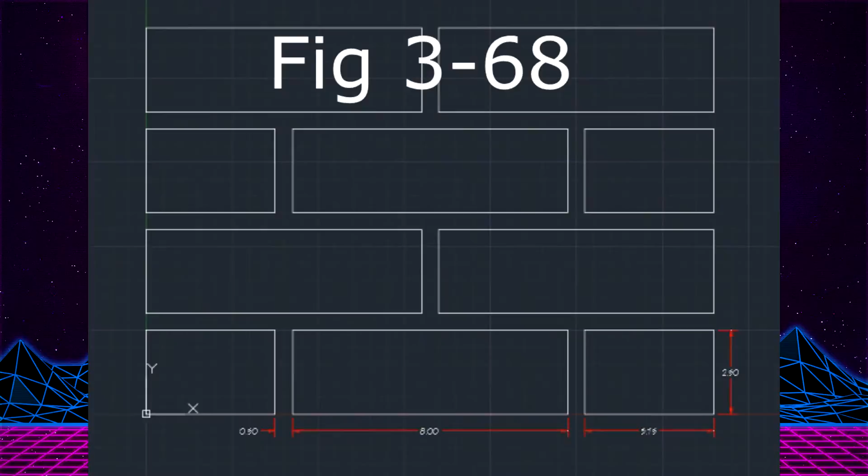So I'm here with my son Luke again, and well, we're getting ready to start another brick in the wall lesson. That would be figure 3-68.

And Luke, you ready to learn? Dad. Yeah, Luke. We don't need no education. We don't need no education. Well, here, I'm just going to put another brick in the wall.

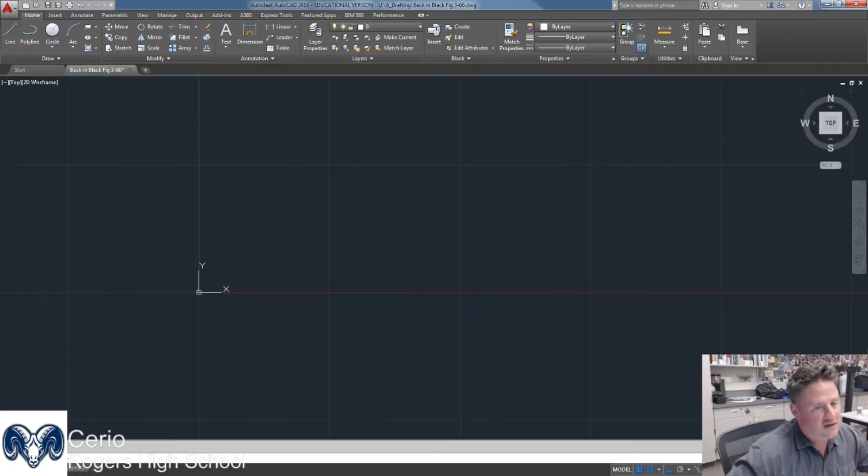So what we're going to do here is we're going to draw out this brick pattern, but we're going to copy and paste using displacement. So I'm going to draw a line, once again starting at 0, 0. But here's what I need to do. I need to establish some points here. So let's go ahead and draw a vertical. And I'm going to step this off.

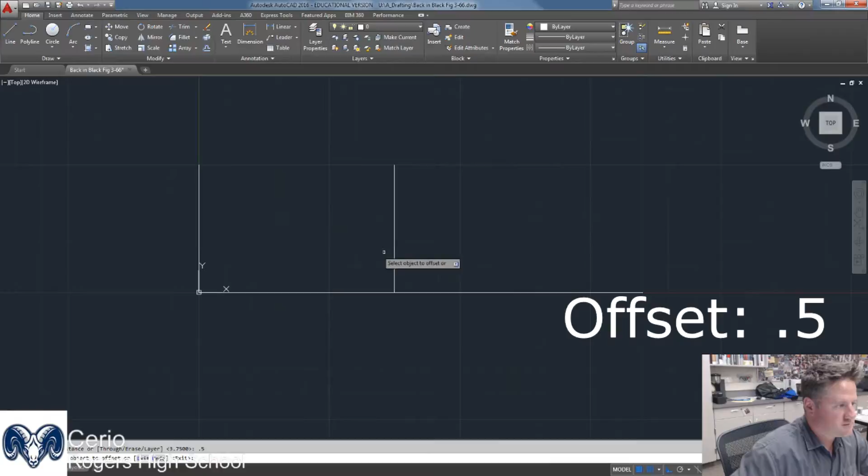I'm going to offset 3.75 here. And the grout line is 0.5, so I'll offset 0.5. And then the large brick is 8, so I'll offset that, 8. And now I want to offset one more time, 0.5. And we're going to offset 3.75.

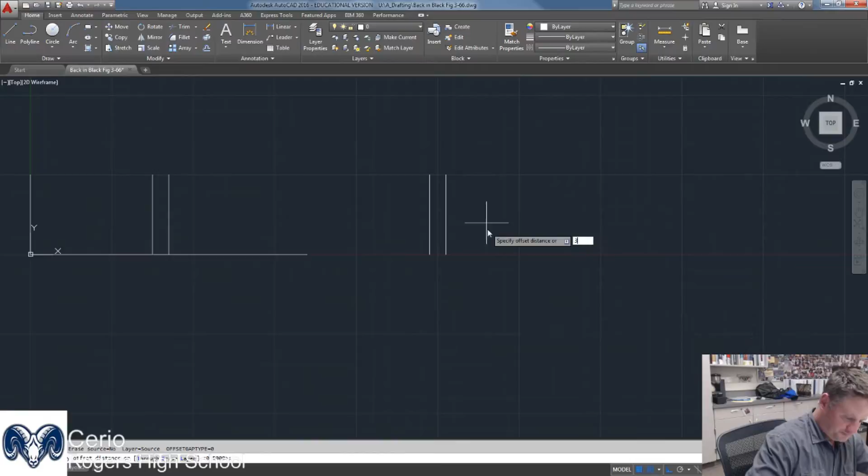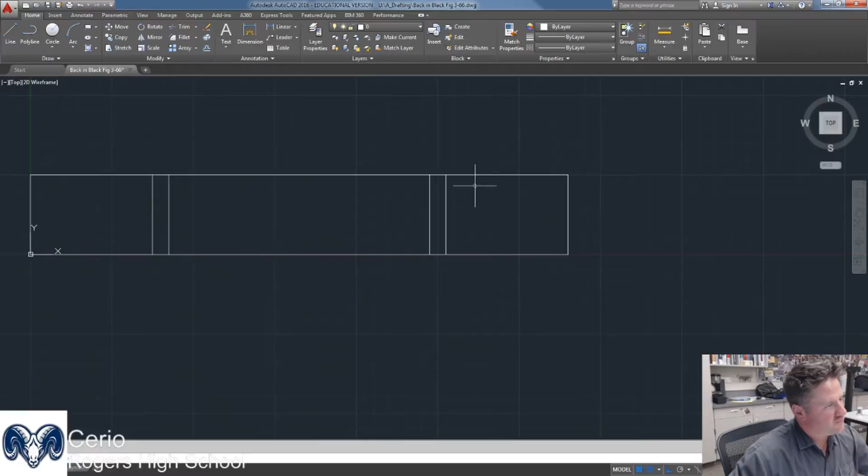And let's go ahead and finish this up. Let's extend here to here. I'm going to now copy this line from this endpoint to here. And so I want to trim this up and make this bottom brick pattern work. So let's go ahead and trim. And I'm going to select only the vertical lines so I can have my grout joints. And I'm going to slide this down just a little bit.

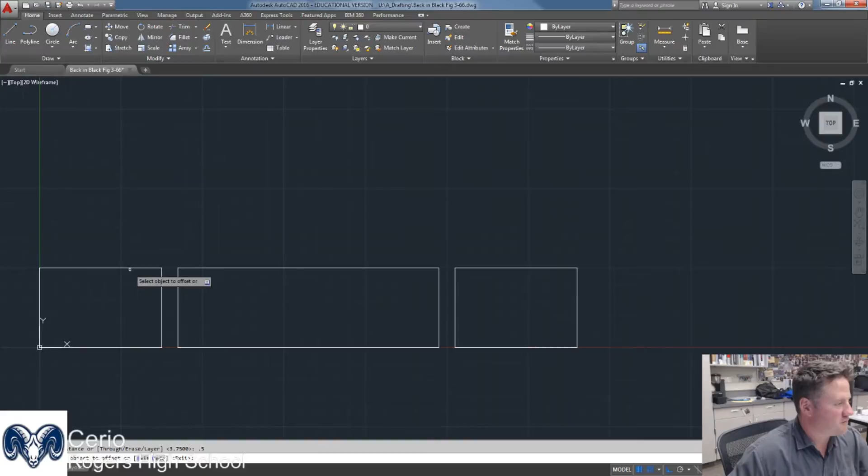Now I need to establish my next grout joint, if you will. And think of these as bricks on a pallet. What we need to do is take this brick and put it here, or we need to copy it to here. So let's take a peek. Offset 0.5 gives me my grout joint. Now watch here. I'm going to move this line from this endpoint to its old endpoint.

And why I did that is if I was to copy this brick to here, this line would be hidden underneath, and when we tried to dimension it, it would be a double line, or if you were doing some NC code or whatnot, it would actually come up with an error because it's a double line or double geometry error. So let's go ahead and now we're going to copy.

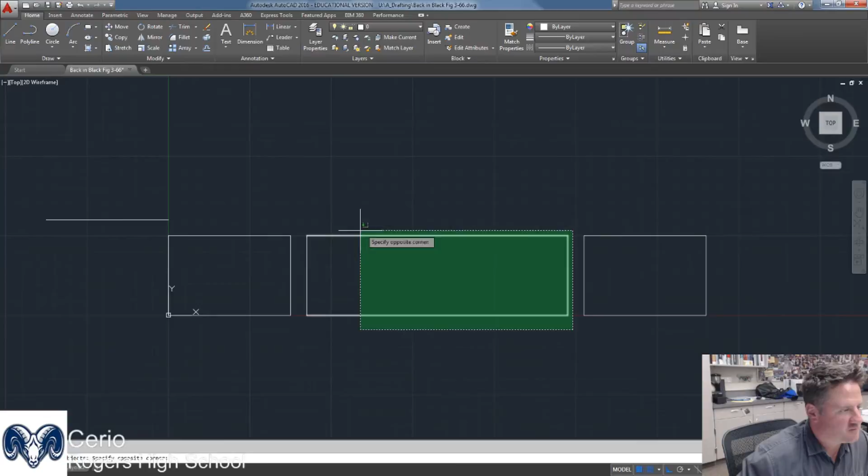Now this is why I need to select the base point. I'm going to select the brick. I'm going to select this intersection because it's going to end up right there. Okay? Now, this is pretty cool. I'm not going to copy that. I'm going to get rid of this reference geometry. I'm going to draw a line from the midpoint of here, and I'm just going to draw it up like so. Now, why would I draw that? Because I'm going to use the command mirror.

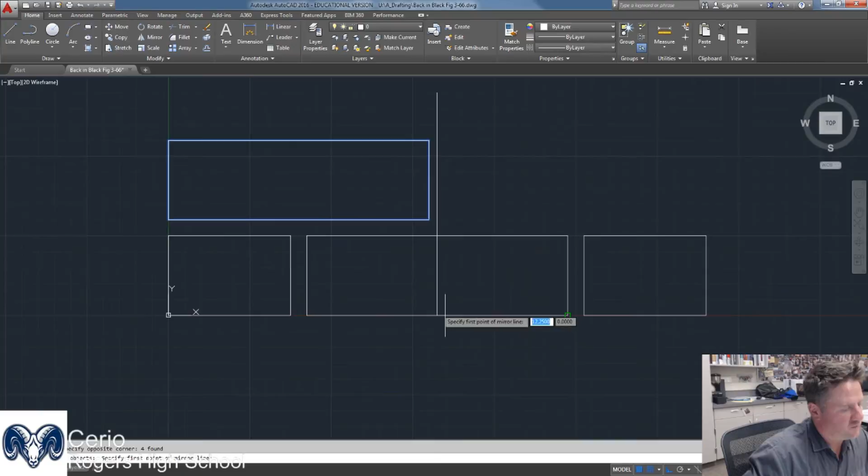I'm going to mirror this brick, and I'm going to use this endpoint here. I'm going to take F9 off. And see here, F8 is still on, so it'll put that brick anywhere in one of those quadrants. And there we go. So mirror, select what we want to mirror, use this endpoint, and there we go. Now the coolest part about this is we're about a line and a half from being done.

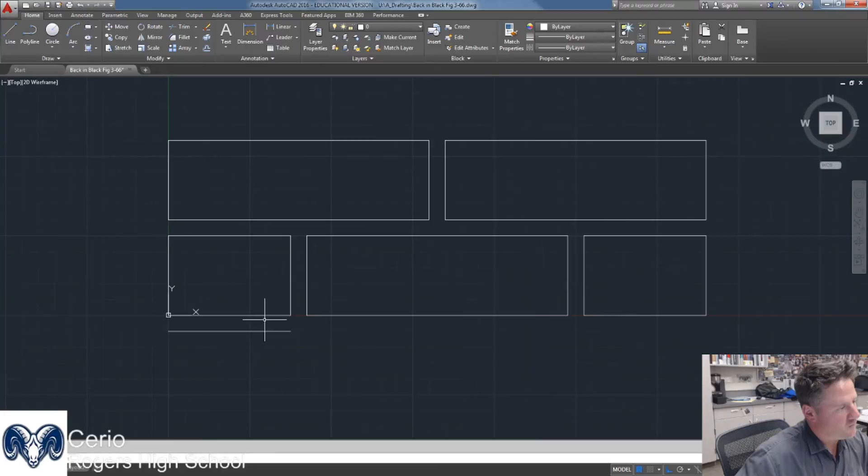So we're going to offset now. And I'm going to go ahead now. All that is a piece of reference geometry. Now watch how this works. I know this pattern repeats, so I'm going to copy the whole pattern from this to here. And if you take a peek, it's all done. I'm going to erase this.

So let's go ahead now and dimension it quickly. Now we're not going to get crazy with this. We're not going to use datum so much. We're going to use dimension linear. We need to call out a couple things. Let's call out the grout joint in the X. Let's turn F9 on so it snaps. Now we need to call out these bricks, how big they are. And this is where we're going to stack the dimensions.

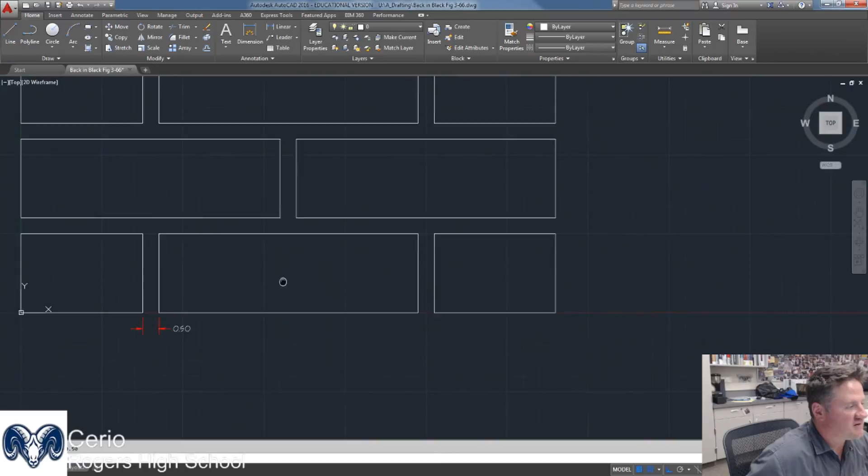Dimension linear. This is an architectural drawing, so we can use dimensions stacked. I'm going to come from here to here. Now watch this. I'm going to line up these dimensions. So I'm just going to click that node. See how they perfectly lined up? But this is in the wrong spot, so we know how to do this. We'll click it, move it to the left, and there we go.

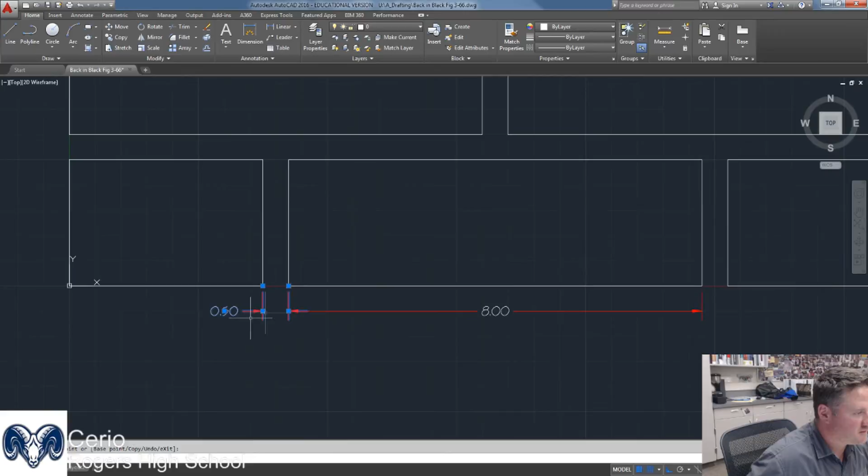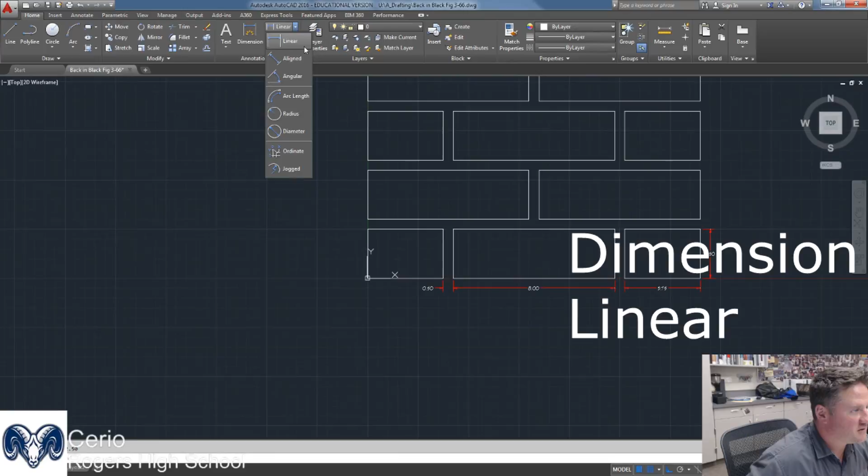Now let's go ahead here, dimension linear from this intersection to this intersection, coming back and touching here, which says, hey, line those up. Now all we need to do is dimension the height of one brick and the grout joint in the Y, and we're done. So let's dimension linear quickly here to here. Snap is still on. Now I'm going to stack this dimension one more time. Dimension linear from here to here.

This dimension here, the grout joint heading horizontal, the vertical dimension isn't necessarily completely needed. If you did not put that there, one would assume that this half-inch grout joint is typical both in the Y and in the X. So we're actually going to remove this because it is over-dimensioned by doing that. So there we go. That is all your bricks in the wall.